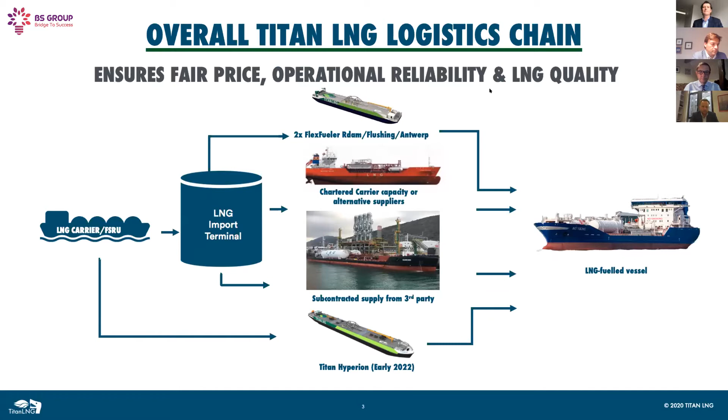Our flex fueler in the ARA has done well over 100 deliveries, and a lot of trucks we still load each and every month. This is flex fueler number 2. Most people listening know about our flex fueler number 1, operational since June last year. Being a very successful business model, we decided to build number 2, which is currently nearing completion at the same shipyard where flex fueler number 1 was built.

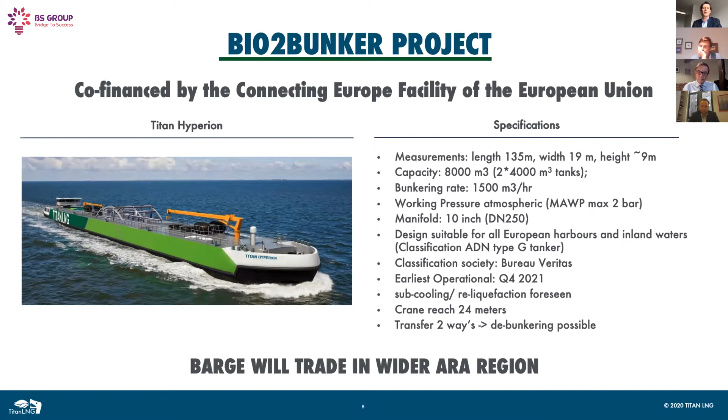LNG is here as far as I'm concerned. Hopefully the other presenters will go into a bit more detail on the supply chain and demonstrate that it's possible, it's here. And we strongly believe that LNG is also a future-proof solution. If you look at this a bit complicated slide, with the inclusion of bio-LNG and potentially synthetic LNG as well,

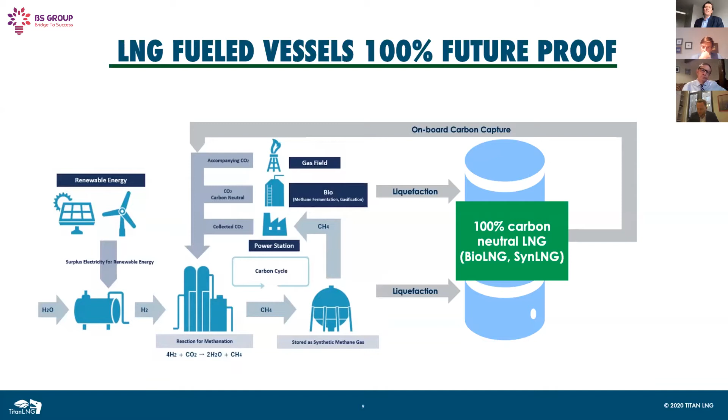we can reduce the carbon sufficiently in order to meet future legislation. So the point here is investing in a dual fuel engine together with potentially in future some carbon capture on board closes the cycle and makes you ready for the inclusion of synthetic LNG as well when it comes up to scale, to reduce your emissions to almost zero.

As another example of what we do, we sometimes have in-depth interactions with some of our customers. Some people find LNG still very difficult to get a handle on, whether it's on pricing, conversion, euro per megawatt hour versus conventional fuels which are pretty much dollar per ton. Our statement here is it's not difficult, it's different. And with it being different, we want to lower the barriers and provide in-depth knowledge to the ship owners or charterers that are on the verge of, or considering, LNG as a marine fuel.

We have developed various tools to compare the pricing of LNG, but also make the right choices in terms of tank size, and to help co-determine - because in the end it's the charterer or the owner itself that makes the final decision - we provide some insights into the anticipated return on investment for LNG powered vessels. So we calculate based on the amount of time at sea, some of the port calls, looking into future prices of LNG versus MGO, and then help co-determine the payback time for the additional investment you have to make to get an LNG powered ship on the water.

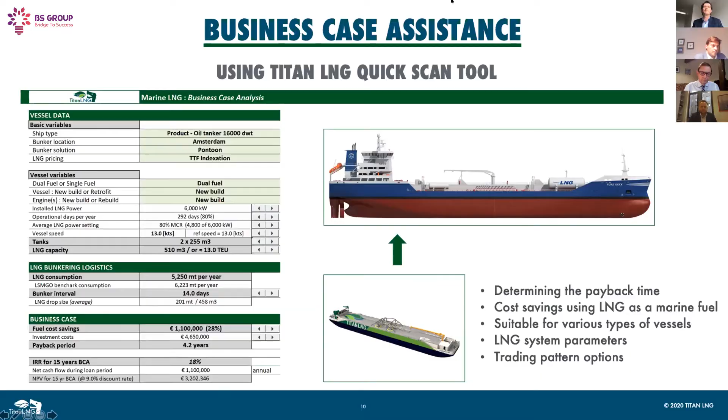Okay, that's it for me. So any questions regarding physical supply, pricing, etc., are more than welcome.

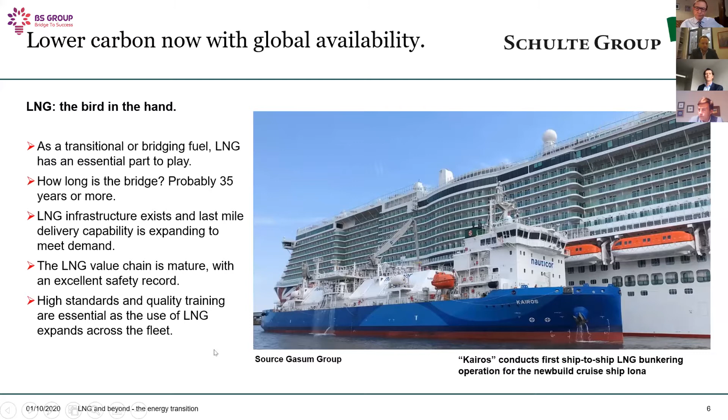There is absolutely no doubt that we operate in a challenging environment. I think we all also recognize that LNG provides a competitive solution - it's a lower carbon fuel with global availability. And of course, there are a number of competing forces driving change within the shipping industry to decarbonize.

The first, of course, is regulation. IMO are setting out to reduce the carbon footprint of shipping, but they have competition. As we have seen, the European Union is very keen to perhaps force the pace more quickly. One of the tools they may decide to use is carbon pricing, bringing shipping into the European Emission Trading Scheme. So regulation from governments and from the IMO, that's one half of the story.

I think the other half is equally important, and that is customer pressure. All the major charterers and their customers are setting very strong sustainability targets, and they are pressing for the shipping industry to play a part in reducing their carbon footprint. Whereas before the shipping industry was sort of over the horizon, out of sight and out of mind, I think that is changing. We are very much counted as part of the value chain, and we are expected to make a contribution to their sustainability targets.

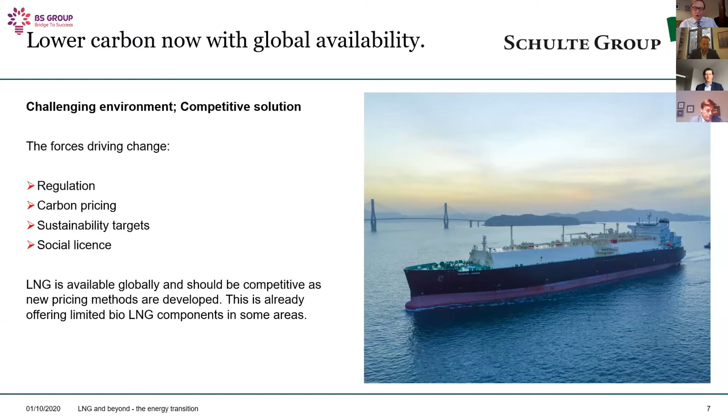Now, we said LNG is a competitive solution. It's available globally. New pricing methods are being developed, and as Michael mentioned, this is already offering limited bio-LNG components in some areas. We noticed that, for example, Gasum as well are supplying Baltic LNG with a bio component, and I think this is something that will probably continue.

One of the things that complicates the question, it's actually a number of different questions depending what age that ship is. There will be many different solutions for deep sea, high energy intensive ships, coastal craft, harbor craft, inland waterway craft. They will all have their particular solutions, ranging from battery hybrid, fuel cells, and going all the way up to deep sea shipping that will require a high energy solution, which we'll come on to in a moment.

And the question is even more complicated because a different solution will present itself for the existing fleet and a ship that you still have to design and build. You have a great choice if you're starting to design and build a new ship. If you have a ship on the water now, which may just have been delivered and has a service life of, say, 25 years, you have to look to see how you can keep that ship competitive and how you can lower the carbon footprint to make it attractive in the charter market.

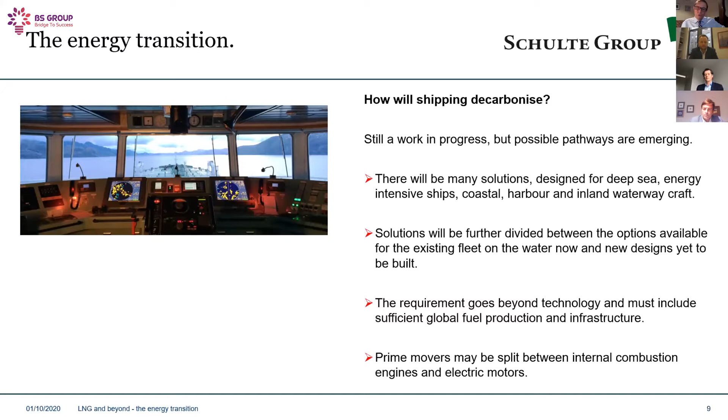As far as prime movers are concerned, we see that the internal combustion engine has a long future ahead of it. It will evolve and will be capable of burning quite a number of future fuels, and electric motors will come onto the scene as well.

Now, in the energy transition, and we're talking quite a long way in the future here, the green hydrogen economy will be absolutely key to how the shipping industry decarbonizes. And it's probable that by 2050 or earlier, zero carbon fuels will have entered the energy mix used by shipping. Now, the front runners this time are clearly going to be e-fuels, using green hydrogen as the building block. And that could be e-hydrogen, compressed or cryogenic, e-ammonia, synthetic fuels, including synthetic methane.

However, to be classified as a true destination fuel, the winners are likely to be carbon-free when consumed, or as Michael mentioned earlier, have some form of carbon capture on board. At the moment, carbon capture, we believe, is a complex system. Ships are not laboratories. If you create another waste stream, you have a cost of removing that waste and dealing with it in some way. So I think in our mind, the jury's out about whether carbon capture on board is a cost-effective way of dealing with this.

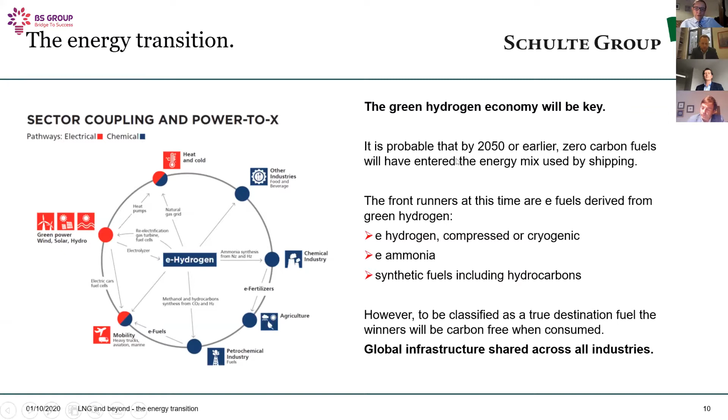So that, I hope, is kept within the 10 minutes. I apologize for rushing, but it's quite difficult to ensure we can come back to some of these aspects during the Q&A. Thank you very much.

This is the Cardissa we're seeing, and that's okay. So all right, thanks, that was my story about the small-scale LNG fleet growing. This is the Cardissa and the Coralius, which I mentioned. Then we come to the Engie Zeebrugge and the Coral Methane.

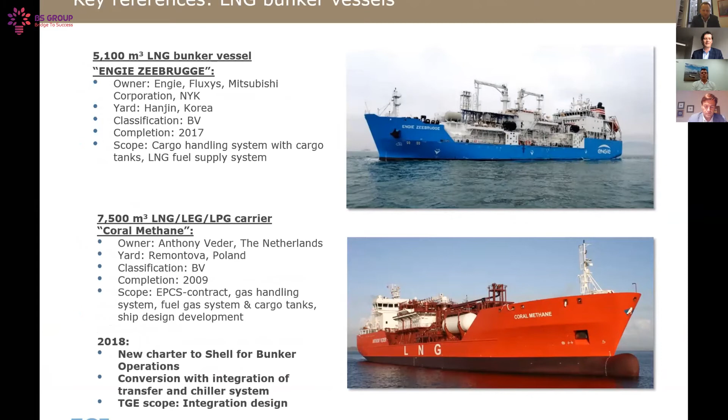So this is the bunker operations prior to 2017. Then we come to the first of operations, and in this example we have the Cardissa bunkering one of the container ships, vessels that is in Rotterdam.

Transition is slow, isn't it?

Here we have the Coral Methane that was first offs with the cruise vessels. So the cruise industry was one of the first to embrace LNG as fuel. It was also one of the most publicly criticized trades, I would say, when it comes to the cruise industry.

It was the first time that we have actually seen in the public media discussions about the fuel being used and the emissions of shipping when this story became public. There was a reaction from shipping, which is good, and which is continuing throughout all fleets and with all ship owners. Now we are going into decarbonization, and this is a development we've seen in the earlier presentations that LNG is a big part of, and that LNG is paving the way for decarbonization of shipping.

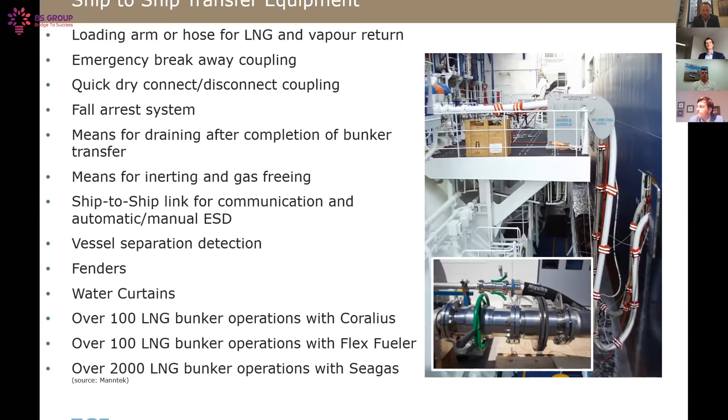So that is the statement I would like to make: yes, the infrastructure is there, the experiences are there, the operations are there. So LNG is becoming a mature fuel to the market. Thank you.

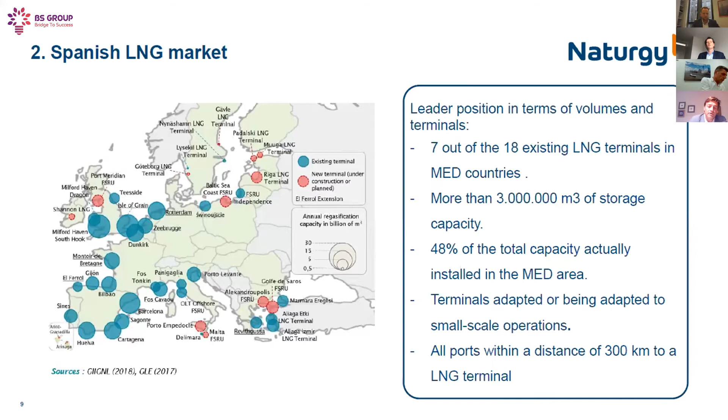Maybe you can see it in that picture how Spain, while we don't have the biggest port in Europe—obviously those are in the ARA region—the possibilities for bunkering, these LNG import terminals, are widespread over the coastline. You will see here, we are not ranking number one, but we have 3 of the top 10 ranked ports in Europe. So if it is true that Spain is so privileged or so well prepared for the development of bunkering, let's see what the figures are, and let's see what's been done right now in the country.

Let's look for evidence, because it is quite wide. This press cut also is from summer, when we fortunately joined a new port providing LNG bunkering. Is it relevant? Yes, it is, because as you can see here—by the way, just one mention—I'm not talking about the future.

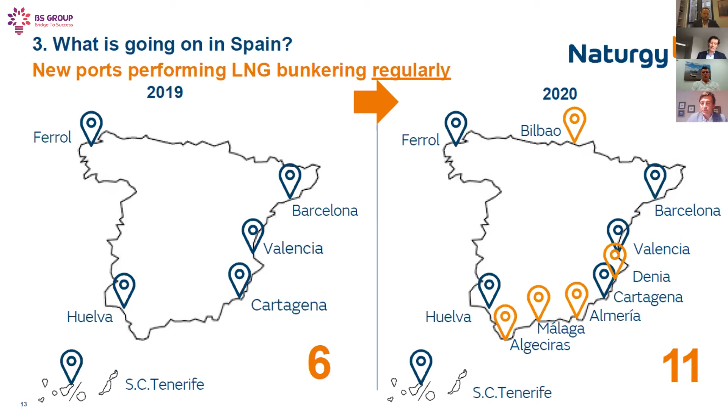Okay, so far we've been talking about LNG. If you look to the left side of the slide, you'll find yesterday, 2019. If you look to the right-hand side, you'll see today, 2020. Moving from left to right, you'll see how we almost double the number of ports that are regularly providing LNG. Today, probably half of these ports are delivering LNG.

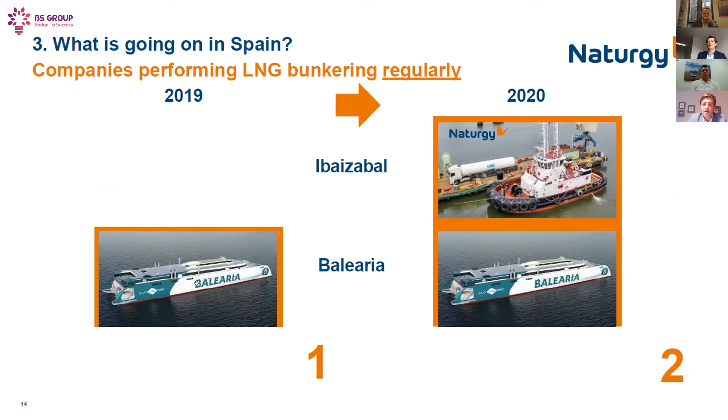If we talk about companies, we fortunately joined Ibaizabal this year to the LNG vessels fleet, and the number one leader in Spain has been Balearia, with a significant fleet. Last year we had six ships powered by LNG, and this year, with the incorporation of Ibaizabal, we are bunkering with LNG as many as 10 ships regularly, because once you use LNG, you don't want to switch back to low sulfur fuel oil.

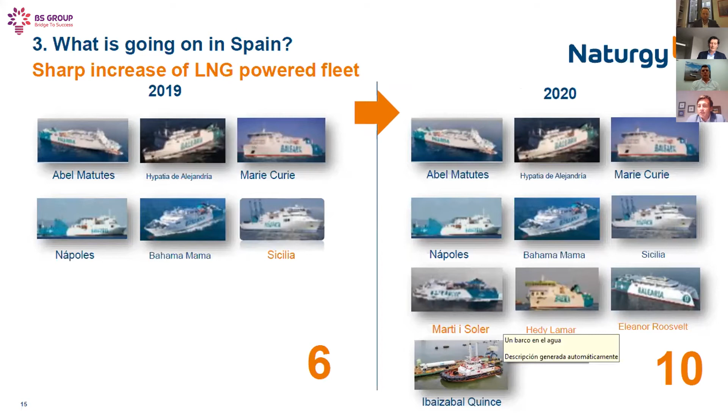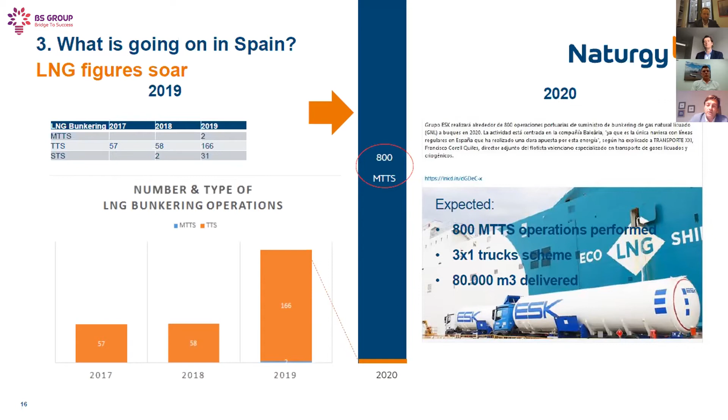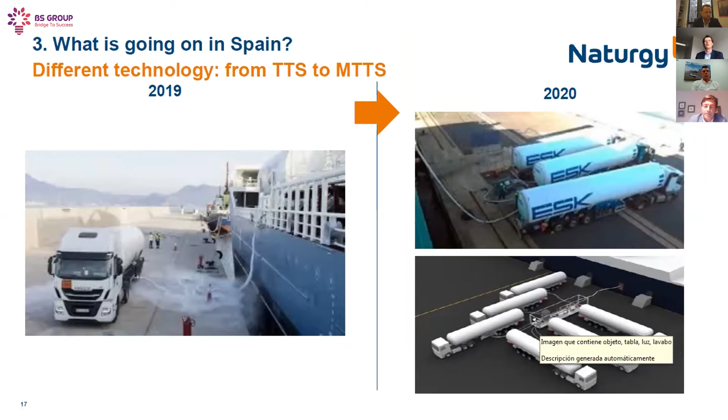Those are the designs that we had last year on the lab, and these are the real pictures that you can see in all these ports that I have already shown.

And again, chicken and egg scenario. Now that we have brought LNG from the future to here, we can say reality has shown us, step by step, how IMO 2020, along with European subsidies, has allowed some companies to jump into LNG. This small demand has triggered investments in different ports, and this investment has allowed the fleet to increase at that rate, up to so far 10 ships.

There are more to come. We will see sooner than later how the investments still grow in bunkering stations, shore to ship, ship to ship. There's a quite interesting scenario for bunker barges to be fitted in Spain.

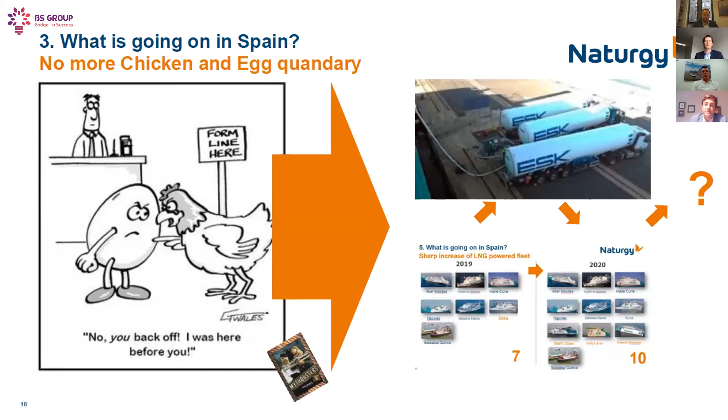What's in the future for LNG? This is one look to the past, what we have learned. Just let me tell you that we have been in the LNG business for more than 50 years. We have proven LNG to be safe, and it's good not to take that for granted. It's good to bear in mind that all the industries involved in LNG bunkering are pretty much concerned about keeping safety standards. There are other lessons, but I won't go into detail on that.

Okay, what can we expect from the near future? This is the only time I will talk about the future. There are more shippings coming, there are more ports ready, more ports performing LNG. We are multiplying and increasing the pumping rate from 2, 3, and 4 trucks at a time, which is a quantum leap from what we just saw last year.

And the more recent changes come from a legal framework, from Europe, and we are introducing it into Spain. Yesterday we released the new rates for third-party access to the national grid, and they plunged, reducing very much the cost for bunkering. We have a new Spanish hub, and we are building new facilities, as I told you.

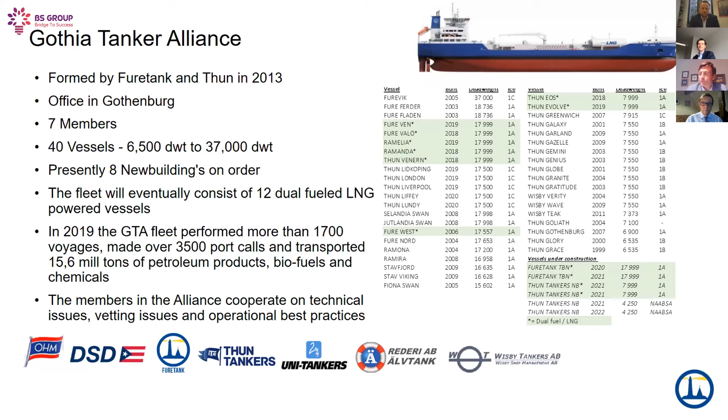Where I'm working is Furetank Chartering, together with Thun Tankers - we call it Gothia Tanker Alliance, and we have an office in Gothenburg. We have a total of 40 vessels, 8 of which are dual fueled with LNG, and 4 more are on the building site. Furetank will actually have a delivery in mid-December from Shanghai, China - that's number 7 in the series. It's very good when we have this group that we can work together - we can share technical issues, vetting issues, and all sorts of issues we have, and also get better prices against the suppliers. That's the most important thing.

The reason Furetank chose to go for dual fuel from diesel or heavy fuel was that they saw the EU tightening sulphur directives in ECA and SECA areas - 2005, then 0.1% sulphur in EU ports by 2010, then 2015 SECA in the North Sea at 0.1% sulphur - and also the demand around the world from society and the political environment. Customer awareness, of course we've seen it, but not so much in the tankers as we wish. We wish for more customer demand so we could share the fuel price benefits or get some benefits for developing. After we made the decision, the 2020 0.5% worldwide regulation came, focused on public health risk and SOx. So the decision was right at the time.

From the conversion of one vessel, Fure West, we ended up with a series of new buildings. Compared with these vessels, we've reduced CO2 or carbon emissions by 55%. That's not just due to LNG, it's more the ship design - everything gets smarter, we run the vessels at lower speeds so we think more about how to run them, and the hull design does a lot there. NOx and SOx are down. The particulates, which we think are most important for the areas we trade in - ports almost into the city center where you want to avoid particle emissions - are almost eliminated, which is good for human health. We've also reduced the noise a lot for these vessels, down by 50%, which is important in areas close to houses, so we keep the industry alive without disturbing people too much.

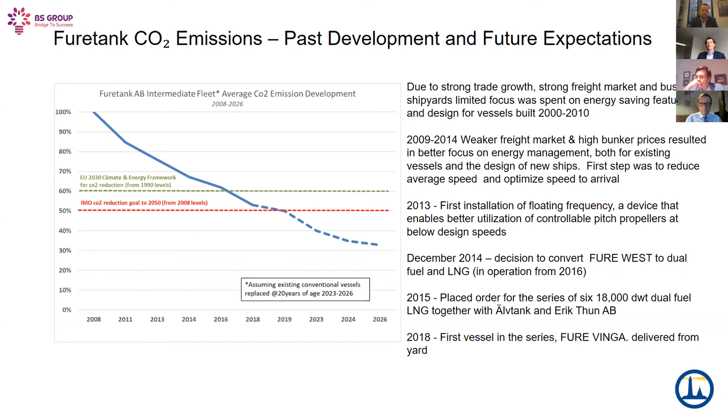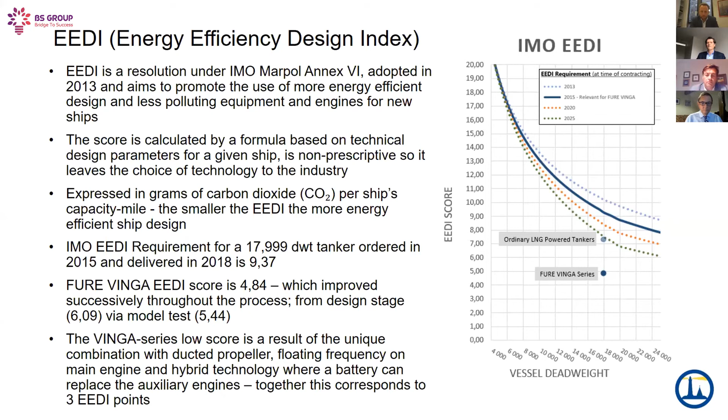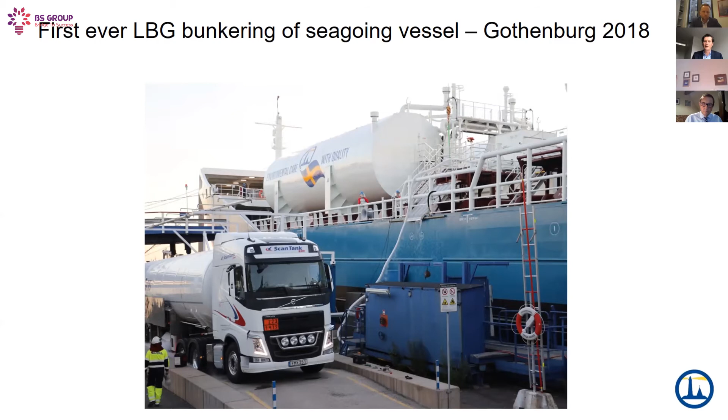As we see here, we have the LNG bunkering development. We trade mostly north of Europe, sometimes down in the Med. In our area, we had Titan with Michael and the guys with the FlexFueler, doing a perfect job helping us do simultaneous operations, and everything is going rapidly with everybody working together. Sometimes it's a fight with the terminals, but one by one they are getting there, understanding that this is good for everybody, that we can do this at the same time as cargo ops, saving time and emissions, with everything running smoothly.

We have Gasum in the Baltic and west of Sweden, sometimes Norway. Naturgy and Repsol we've done in Spain, Cartagena. We're looking to the future, maybe in Huelva and Cartagena also with the terminals. We actually had a vessel over in New Orleans, and we did the bunkering in Jacksonville - it was the first non-US flagged vessel bunkered with LNG over there.

Since we are one of the front runners in this, we find it quite easy to do bunker purchases, but I understand that in the future, when you have a lot of other companies and suppliers coming in, it will be quite hard. So we are in the pilot project of a program called FuelBoss, where you can order fuel and see where the vessel is. We find it quite useful, but it will be more useful for new people running LNG vessels, and also for the future - that will be a good thing. We are also ready for biogas, we are there and we can do it. It's just a matter of, I believe, the price.